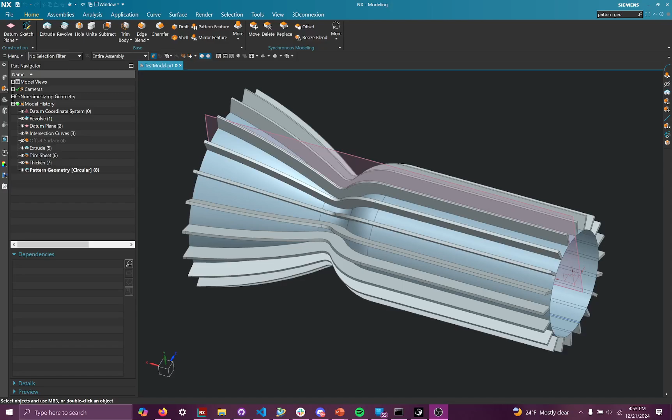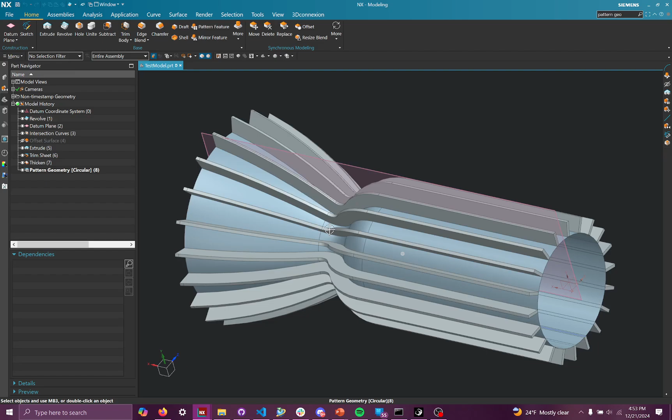I'm just going to go over the method I use to make this type of regen-like chamber. I think it's about what you have. And again, this isn't going to be a definite 'use this method' - it's just a tool I'll share with you guys so you can have it in your arsenal. But to start, I'm going to roll all of this back.

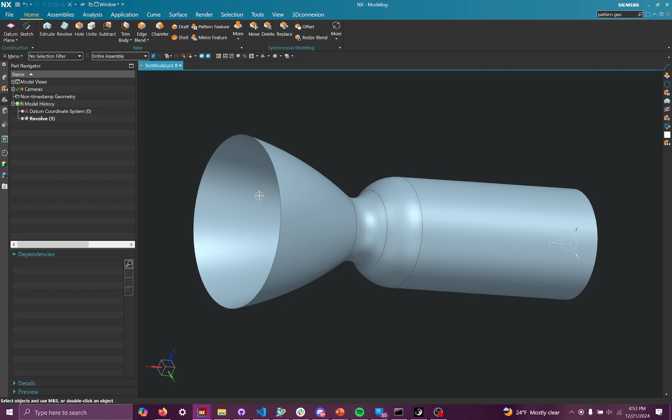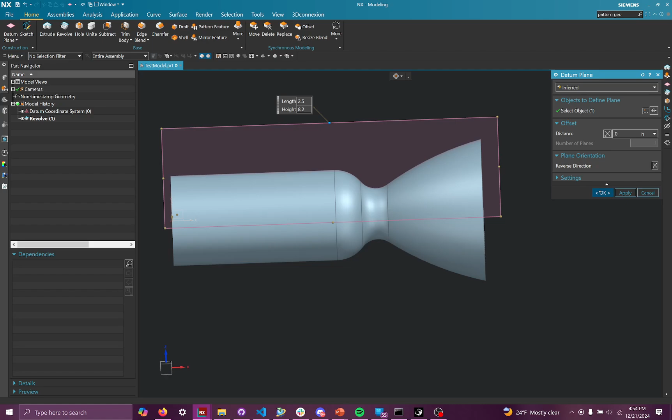I'm left with just this profile for the chamber. This is right now a sheet - it's not a solid, but it really doesn't matter. What I'm going to do is make a plane. This isn't technically a requirement because you can use the plane from the default coordinate system, but I'll make one that's in line with the center line of the chamber.

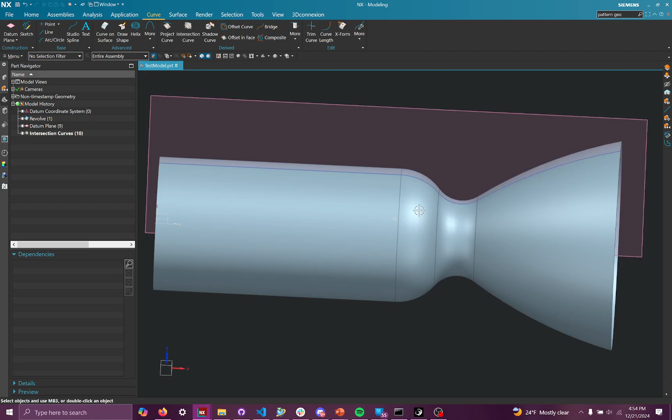With that, I'm going to go to curve, intersection curve, tap on the surface defining the chamber, and then use that plane, and that'll create this blue line following the profile of the chamber. There are actually two of them because the plane goes through both sides of the chamber, but we'll only use one of them.

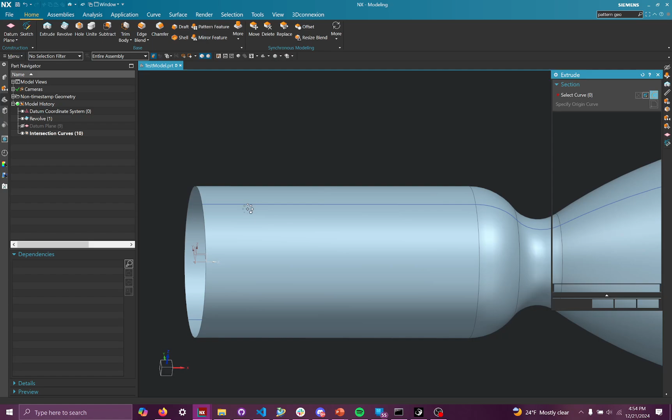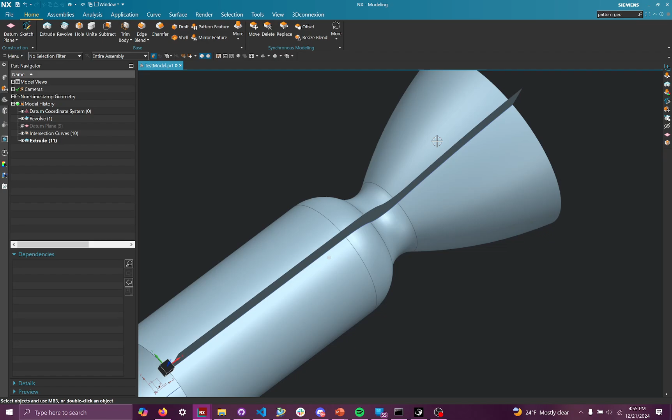From there, I'm going to extrude that line, and select a different vector so it goes straight up. I'm arbitrarily going to have it be however long, so it's way over the end length of the fins. Obviously this isn't what it's going to end up looking like - we're going to trim it down to the actual exact fin length we are targeting.

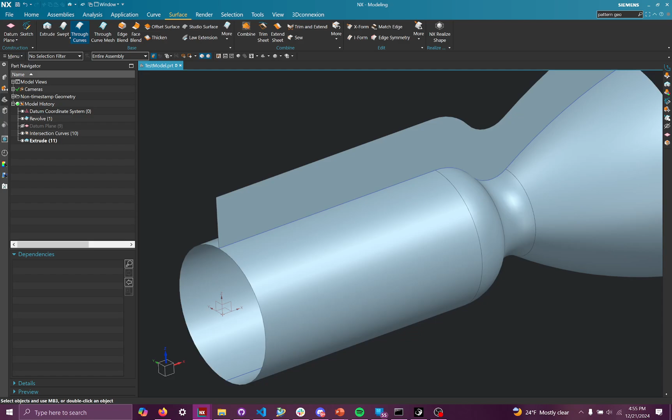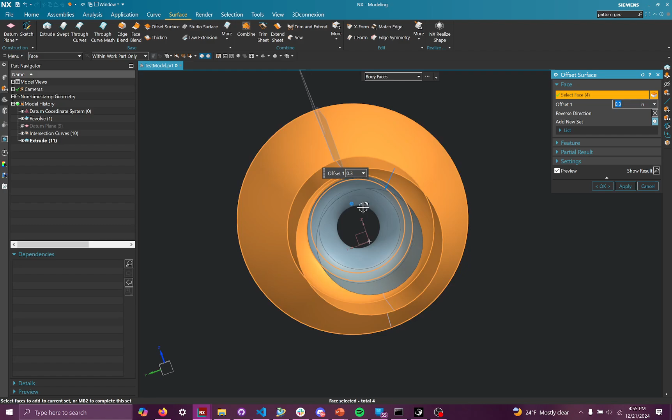To do that, I'm going to go to surface, go to offset surface. Click on your chamber again, and this will create a surface at some distance away from the surface you click on. It's kind of like an offset line you'd use in sketching, except it does a surface. Right now it's making this offset surface on the interior - I'm going to use reverse direction to make it happen on the exterior.

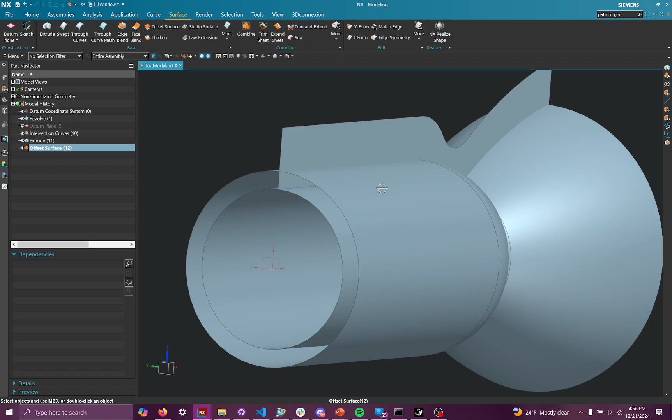Let's say we want a 1/4 inch fin length. I'll hit that, and it'll make that offset surface at a 1/4 inch. Now we have two surfaces, one for the original chamber and the second for this offset, and I'm going to use this offsetted one to trim down this fin surface.

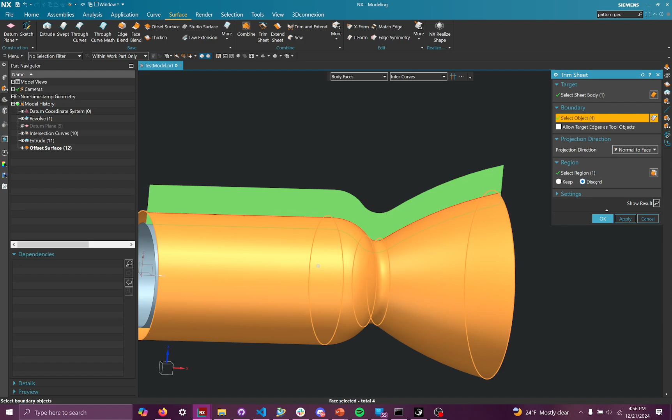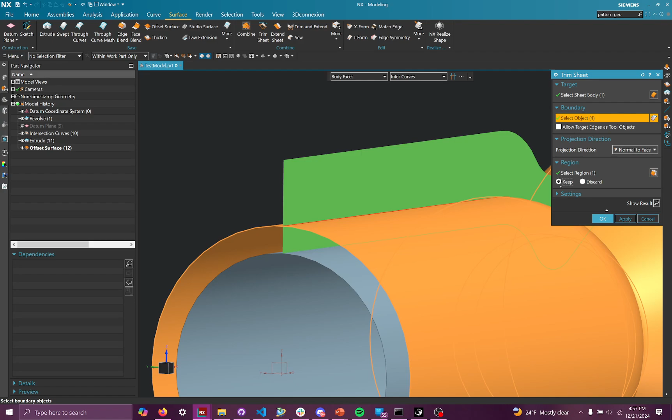To do that, I'm going to go to trim sheet. I'll hit the fin sheet as the target, and the boundary as this offset surface. I'm going to select the region as discard, because whatever part of the sheet you click on will be what it's referring to when it says select region. I clicked on this outside bit, so I'm discarding it. If I were to click on the in-between bit between the chamber wall and the offset surface, I would select it as keep because I want that to stay. That's a little trick it doesn't really explain, but anyway, I'm going to trim that down.

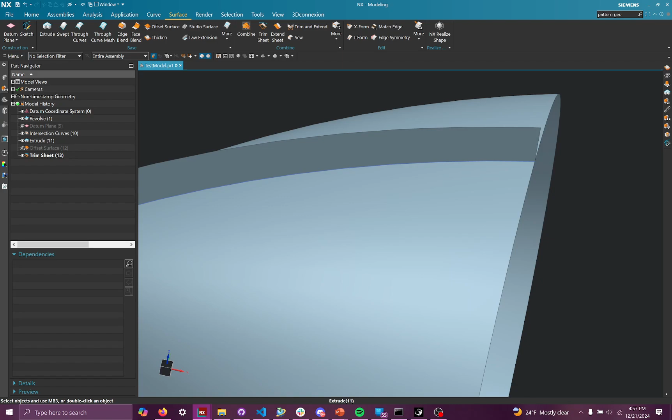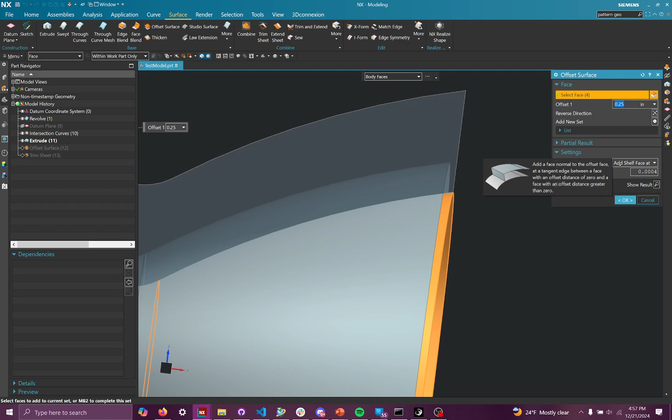If I hide that offset surface, you're left with this profile. One thing that may or may not matter is this little bit on the edge - if you look at the offset surface, you can see the fin goes beyond it a little, and that's an artifact of how the offset surface was made. I think I can actually change that, but I'm not going to bother with it - it shouldn't really matter because it kind of extrapolates that extra distance when it's trimming it down.

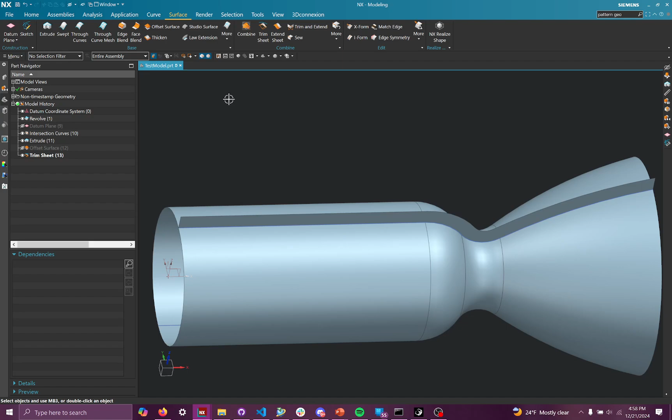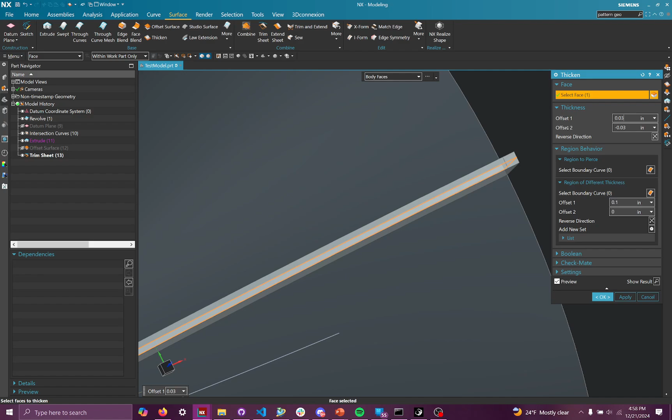You'll just see a little bit of the edge there when I thicken this fin, which makes it an actual body by hitting the thicken tool, clicking on the fin sheet, and you can change the offset. Right now I have it as 0.03 and minus 0.03, so we can have thickness on either side of that surface. If we only have one offset thickness and set the other to 0, it will only thicken the right side of that surface. But we want it even and symmetrical, so we'll do both.

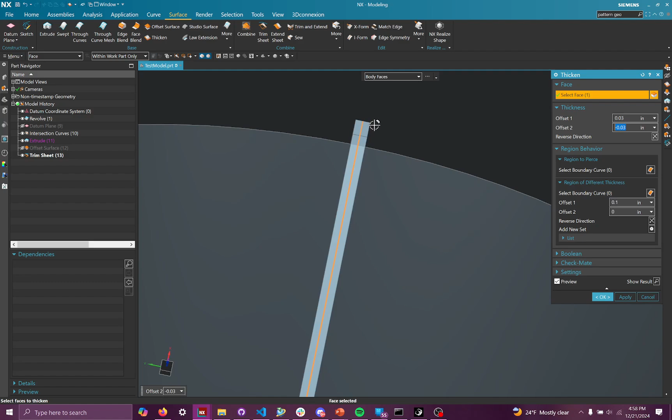There you go - that's how you thicken it, and it will create a body. You can tell it's a body because now it's grayed out a little bit, and I can hide that trim sheet, and you're left with just the body. There's that little edge thing I was talking about where it extrapolates that trim.

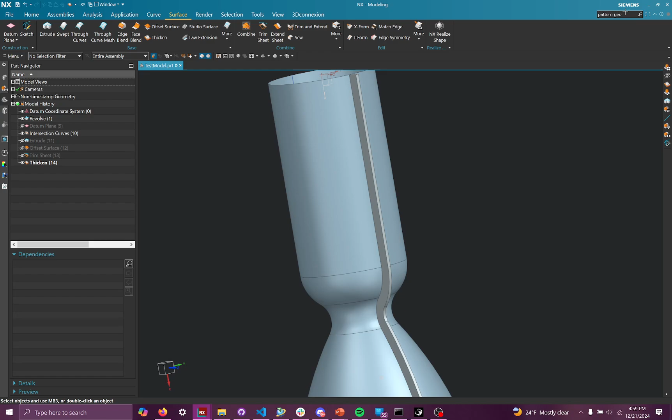From there you can just - I like using pattern geometry for patterning this type of stuff because it's a little less computationally intensive than pattern feature. So I'm going to click on that, specify vector, let's say that's fine, and then 20, whatever you need. And there you go, that's pretty much it.

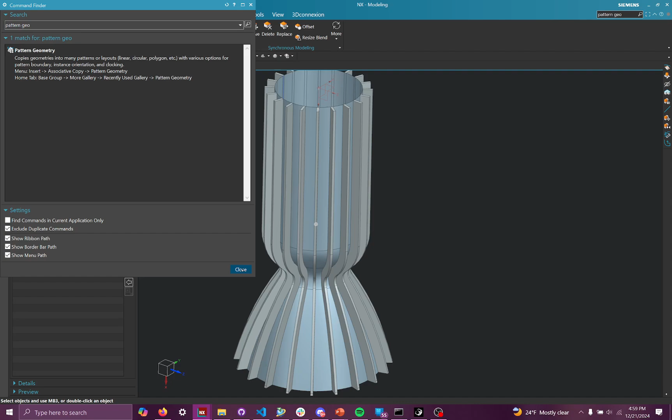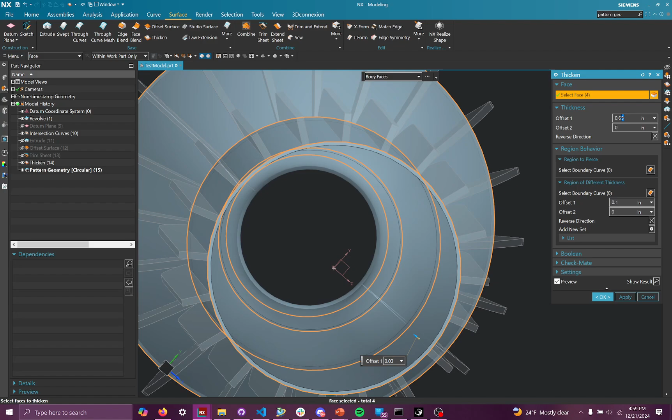If I want to be thorough, I can go back here and thicken this chamber, and in this case I'll just have it go in one direction away from the surface. Let's make it 0.7 to make it a little thicker and more obvious. Then I can boolean - let me see where, yeah, there's the boolean. I can do pattern geometry, this thicken.

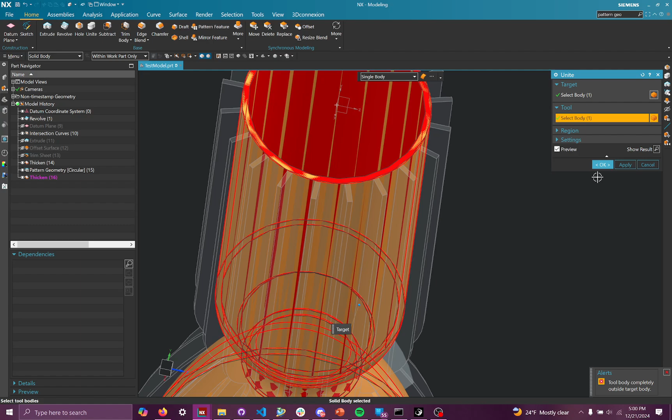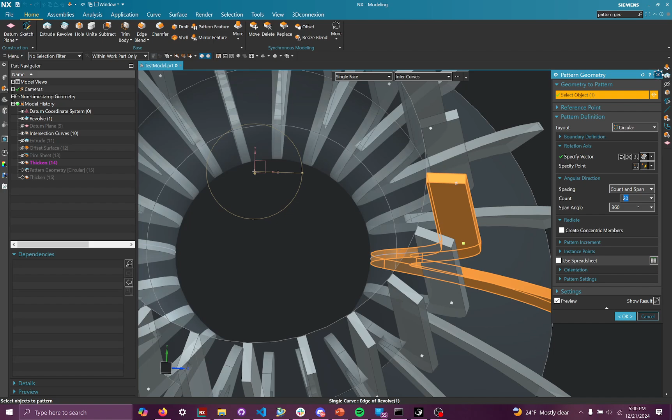This is actually something that's sort of common with working with surfaces. Let me fix that real quick. It happens when things are, like, either perfectly, or it happens when things are intersecting at a point, I believe, and that happens if you're very precise with how things are overlapping. It's a weird little thing that pops up from time to time, and the best way I found to get rid of it is to have things overlap with some amount of thickness, so they're not overlapping at a point or a line. That seems to be where you get that issue the most.

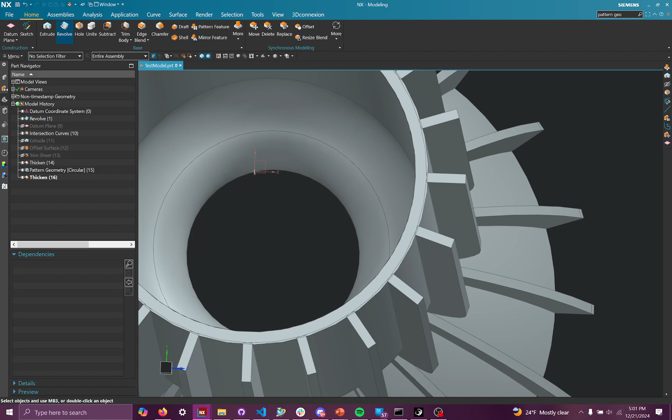So really quickly, I'm just going to unite up these rest of these bodies. Make sure I click on the original one, and there's your chamber.